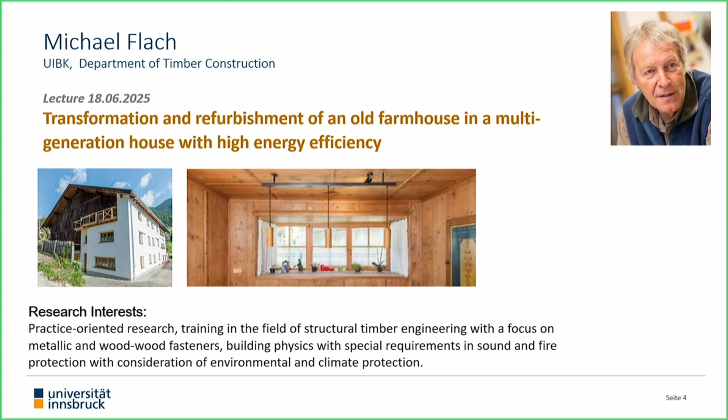Welcome, Michael Flach. Thank you. Thank you, Rainer. You switch on, I'll just go ahead.

It's the first time in this nice room here. It's huge. Not many people, but I guess all the people are outside, watching from outside.

I'm retired now since 5 years, but as you can see, I'm still teaching. I'm looking for nice places to teach. I'm teaching every year in Corsica because I speak fluently French, and also in Italy, in Rome every year. And since last year, I'm quite often in Bhutan, the Kingdom of Bhutan, a Himalaya state. I just came back after 4 months of English teaching, so my English might be a little bit Bhutanese, but it has improved because I don't speak English very much otherwise.

Rainer told us it's about refurbishment, but it's about climate protection. We know the last numbers of warming up, we have now here about more than 3 degrees of warming, so we really can feel it. We can feel the consequences, especially here in the Alps. We have seen in Switzerland what happens when the mountains defrost and rocks come down.

I just give a summary first. You have everything in German in black, and in English in green, except the last part which is only in English. I speak a little bit about my background, it's a little bit philosophical, I have a special approach about engineering. I'm speaking about my doctor thesis about ecological timber facade, which was quite new because most facades are made with artificial materials. Here we had a system which is prefabricated with ecological insulation material. Then I speak about my farmhouse.

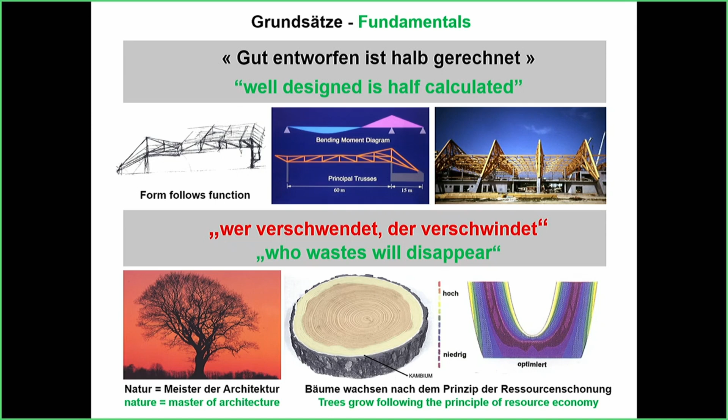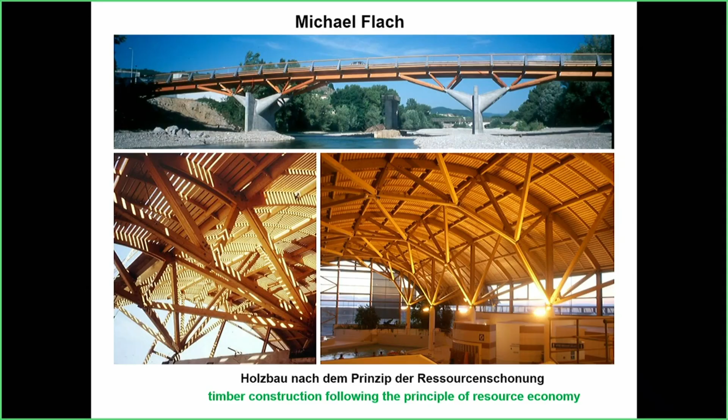And this is my kind of structures. They look complicated, but you see there's a kind of passion and an approach seen from nature. And nature never has simple linear beams as we see in 90%. You just look here upwards, you always have linear beams, very easy to calculate, very poor design work. But in nature, if you see the branching, they are always spatial structures, interconnected, redundant, and much more effective than the simple structure here. I will come back to it in the last part to explain.

When I applied for Innsbruck, we were 20 candidates. I was coming as an outsider from France.

Nobody knew me here, and I was the only one who had no doctoral thesis. So in the end, I was chosen ahead of the 19 doctoral theses because I had practical experience, and because I announced that when I'm teaching, I teach how to design, and not only to make formulas or mathematics and no construction design, as I suffered when I studied. I suffered from the poorness of design, of the principle of design. And if you want to design, you also have to work, you have to apply.

I lived in a period when we were pioneers with digital technology in designing. So I had the very first CAD license in France with CAD work. You have seen the office was very small. I didn't have a place for a design table. So we decided to do everything on CAD, on computer, to save space. And so we became pioneers of digital designing.

And then after designing came the fabrication. You have the CNC machine that gets the information from your CAD plans directly, without paper. And then you have a very precise full production. And modern timber structure has made a big step. We call it Quantensprung, a big step, because of digital technology.

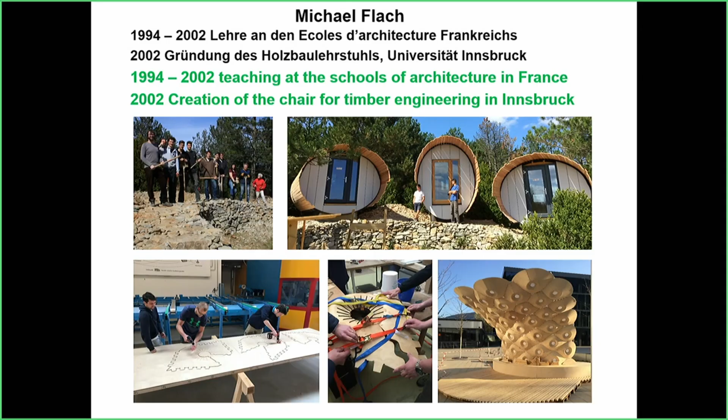It's the entry of our building. It's made of 42 elements, which are all different. And everything is so precise. You stick them together and you make an amazing thing. This is just a pedagogical experience, but they learned. And then we built other buildings here also with CAD. We collected pieces from Tyrol, and then I loaded a big truck to bring it to southern France, and in 1 week we built a passive house barrel, which is a tiny house for students.

So I came in 2002, so it's 20-some years ago. I always live in periods of 23 years. I came at 23 years old to France, and at 46 I came to Austria. And after 23 years now, I'm going to Bhutan, and we will see if I still have 23 years left for Bhutan. We will see that.

And so I was a new generation of professors. Timber was a new material. So I raised up a timber chair at the University of Innsbruck, which is astonishing because Innsbruck is a kind of capital of the European wood industry. Inside a circle of 200 kilometers, you have all the big players of the timber industry, especially the glulam industry. You have Binder, you have Pfeifer, you have Egger, you have Rubner, and some others which produce more than half of the production in Europe here around, with the wood we get from here. But they had no design training and no timber engineering, so it was time to build it up.

And then I felt that timber alone is not enough, and I was happy when Wolfgang Feist came. I phoned him in Darmstadt and asked him if he preferred to live here in the nice mountains rather than in the cloudy Darmstadt area.

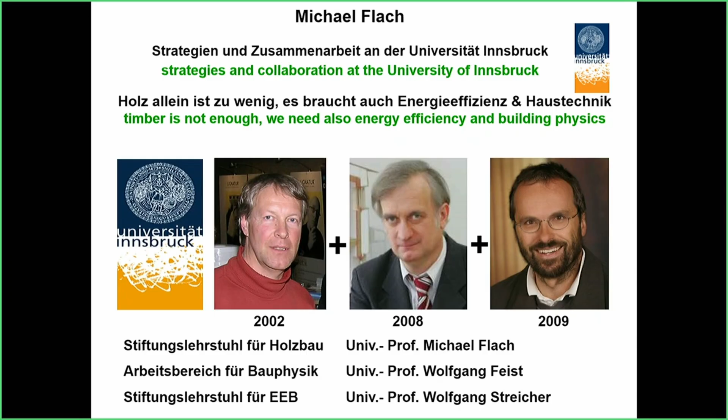And fortunately, he accepted. So we shared, I guess, 15 years together, and we worked on projects together. And then there was Wolfgang Streicher. I don't know if you know him. He's more in the energy field, but he was a very good complement for our research work.

So one of our projects was a smart city project. You worked on it too, I guess. Everybody worked on it. It was, I don't remember the date, 2012 or 13. It lasted 7 years. The idea was to make a demonstration project on how to reduce the energy consumption for heating in cities or in districts, to reduce it by about 50%, by refurbishing, by renovation.

So we are now in the topic, and then there were measurements. So we worked on it, and it finished with monitoring. Everything went well, but I was not very happy because I was hoping that there would be some work for timber engineering or timber refurbishing. Everything was done as business as usual. That means 99% of our external insulation is polystyrol, artificial insulation materials.

And the first thing we did was a life cycle analysis between the artificial classical insulation complex and an ecological one, made of natural fibers, of wood fibers, of hay, of cellulose. And the reason to do that is, I completely agree that passive house is the best practice, the best solution we have today, and I agree with everything of the concept of Wolfgang Feist.

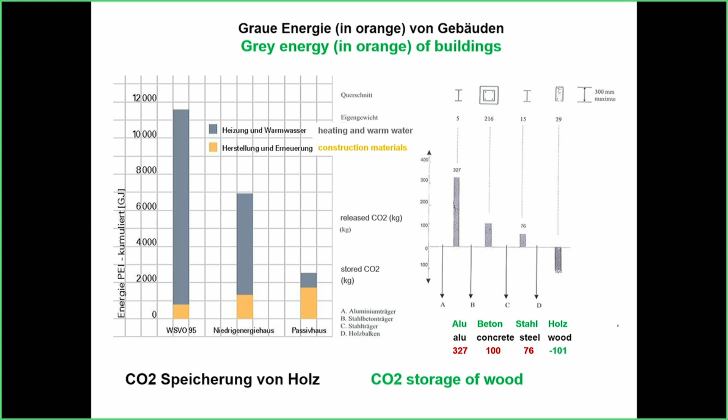But today it's clear that if we substitute concrete by timber, we save approximately 2 tons of CO2 per cubic meter. So with today's climate change, we have to care about everything which can reduce it. The same thing is true for insulation materials. So I started a doctoral thesis with Clemens Le Levé. He did his work on a topic called the ecological timber facade. So we had some basic principles for his work.

We wanted to have standardized elements, timber frame, which is the cheapest mode of timber construction. We only use ecological insulation materials. We didn't have ventilation because it's a cost question. And then we need a system to hook it, to fix it on the facade. This was one part of his work. We call it a system connector to make it easy. And it must conform to the passive house standard, open to vapor diffusion. These are some physical basics we respected.

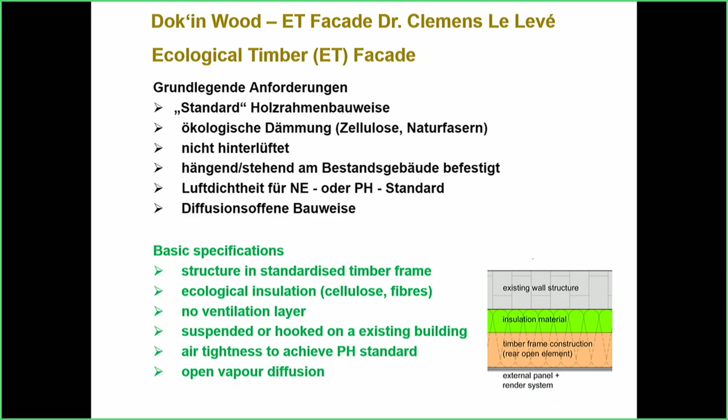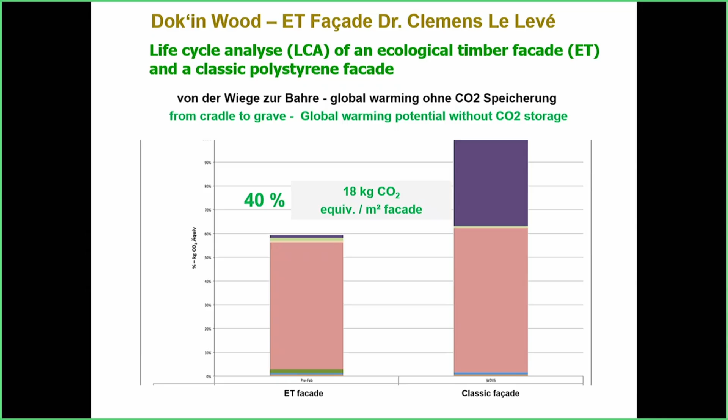And then here we did this LCA analysis. You see, for the fabrication, the difference is not very big, but if you take into account the recycling, some of these materials were quite toxic, and recycling was quite expensive, and even with the energy balance, we had a difference of 40%. So insulation is maybe only a small part of the building, but it's a part of it, and if we can reduce it, it's normal to substitute.

And then we have the process of how to use this panel. The first thing is, in timber construction, we were used to digital techniques. So we made the inventory of the building with, what's the name? A tachymeter.

A tachymeter is a kind of laser machine. It sends a cloud of points onto your subject, and then it gives a digital print of your facades. You can have very complicated historical facades. It gives you really like a plaster, a digital print of it.

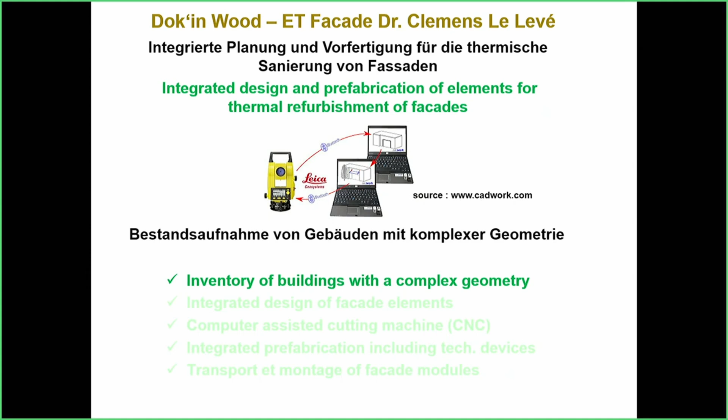And then the next step is to bring it to your CAD system. We were used to working in CAD. The cloud of geometrical data goes into a CAD program, and then you can build by prefabrication in a factory or workshop. You build an element which fits the digital imprint you made of the facades.

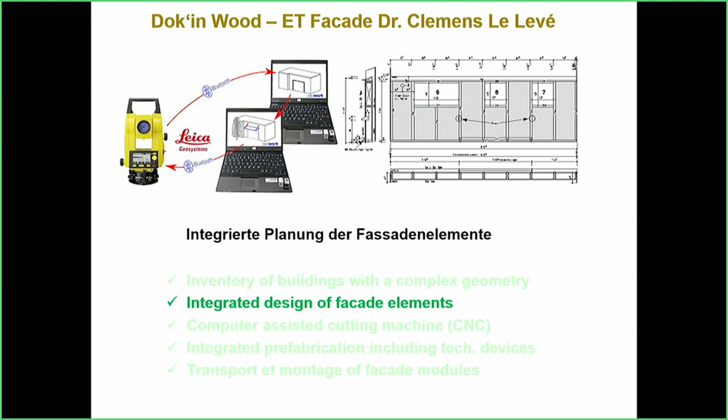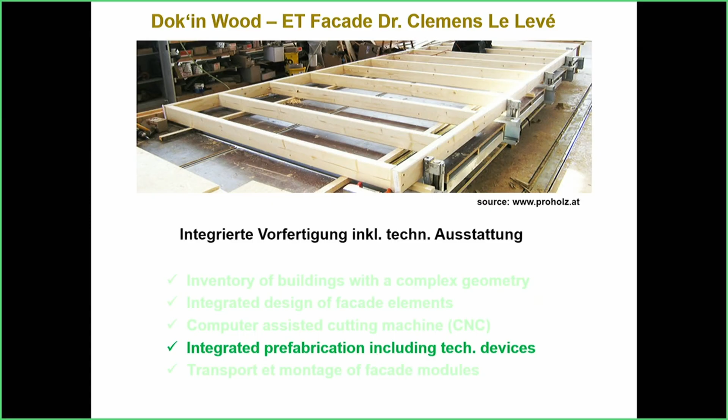So you have the counterpart, and then after CAD, you bring it to a CNC machine, and everything is very precise. You don't lose data, you don't lose precision, and everything goes very fast. And then you have computer-assisted cutting machine. Here you see these are easy elements. In America, all the buildings with 2x4 frameworks are done this way.

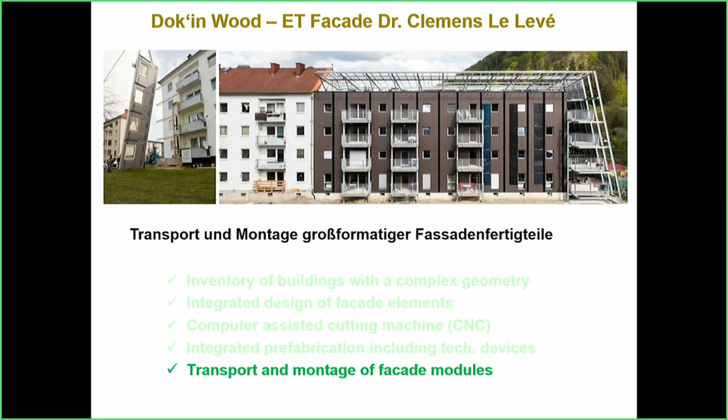And then we had the transport and montage of it, but we also needed a connector. So I'll show you the work we did on a connector. The connector is made of two parts. One steel part is fixed on your wall. You can have different types of wall, different qualities, with two bolts, as I will show you later. And then another part is fixed on the prefabricated element.

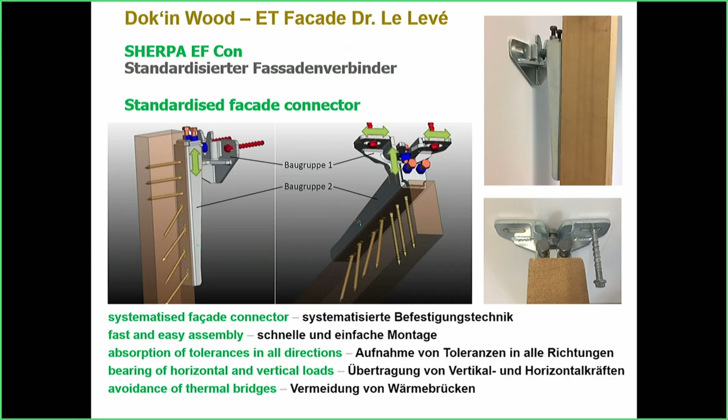And then you connect them together, and you have a kind of millimeter regulation to put your prefabricated element in vertical or horizontal equilibrium to make it fit very precisely. So we developed a steel connector. We tested it for all the loadings, and this is a systematic concept to avoid complicated design and to make it ready for the market, to produce it in big numbers.

And then if you produce this kind of prefabricated element, you face all the fire tests you need to have a certified element. You cannot just build as you want. You have to prove it, and you have to do more than calculation. You have to do some fire tests.

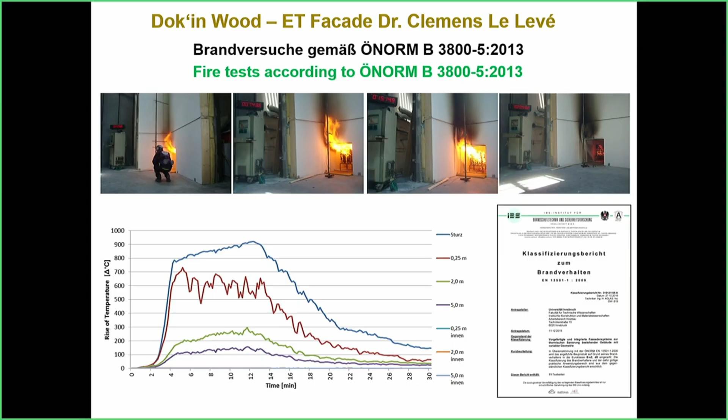So the company Neue Heimat, you know them here, invested and gave some money to do the fire test, and now we have the certificate to use these prefabricated elements for buildings of maximum 4 stories. If you go higher, it's more severe, so we just go step by step. And then you need somebody to test it. So I was the one who tested it.

I bought a farmhouse, not only for the test, but I was always dreaming of it as a young engineer. My first business concept was to buy an old farmhouse, refurbish it, then sell it for a good price, buy 2 other farmhouses, and have a kind of snowball system to become a rich man. But things happened differently.

But coming to retirement, my dream was still open, and I had the time to look for an old farmhouse, which is not very easy here in Tyrol because everything is expensive. So I traveled 2 years with my bicycle in every valley looking for farmhouses. You cannot easily buy a farmhouse if you're not a farmer. It's reserved for farmers. So I had to buy a farmhouse where the former farmer built a new one and took the right of use in this new farmhouse.

So I found one here, really by chance, which was affordable. It was not so expensive, and I liked it because it has a nice south facade with the bracing system. You see it, but it was a huge building, about 600 square meters. This building already has a history. It's precisely 400 years old. Many of the old farmhouses have this age.

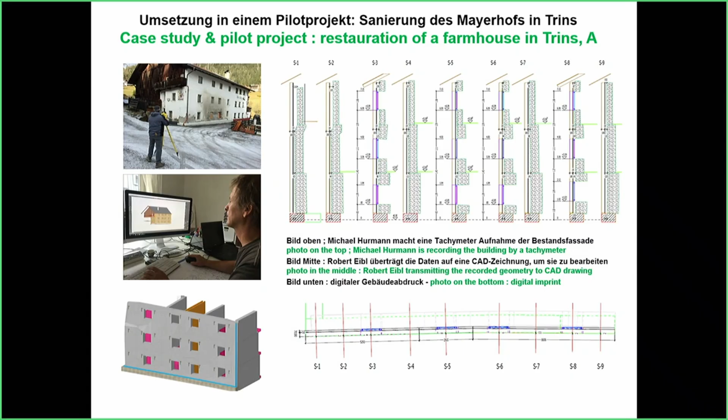You must do this inventory to prefabricate something that fits with a precision of 1 millimeter or 2 millimeters. If not, you have no airtightness, you have empty spaces, etc., and a lot of work. But if a machine is doing it, everything is prefabricated, and things go very easily and very fast. So we started prefabrication. It was about 10 kilometers from the Gschnitztal in a carpentry.

So we had the structure. We put in the windows too. We had to change the windows because the windows were old with simple glass, so we had triple glass windows. And even the opening around the windows had a special geometry, and you can already see here the different metal system connectors, but you also see the different pieces of wood with different thicknesses, adapted to the geometry of the wall.

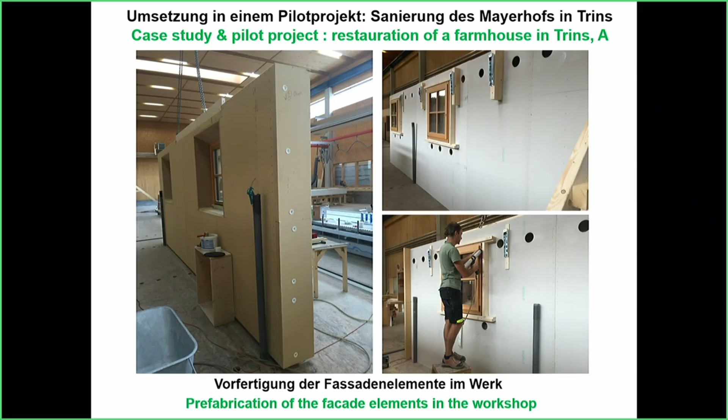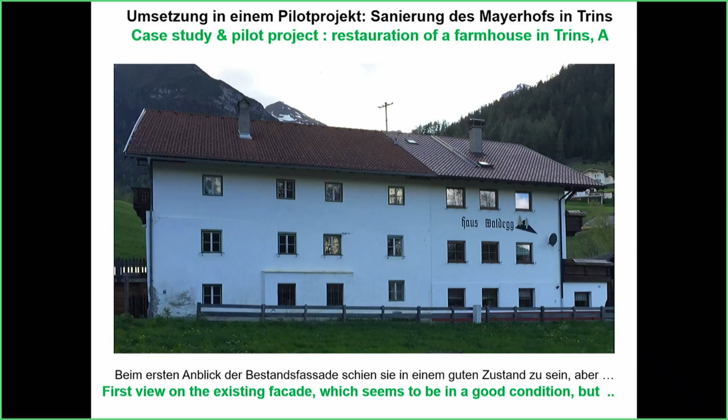So there was nothing constant, nothing similar. But if you do it with a digital tool, it's easy to do. You just follow the different steps, and then you have a well-fitting prefabricated element. So first the wall looked quite easy. It looks straight and everything. I want to keep the same opening of the windows, because it should have the same exterior after. I don't want to make a modern architecture house. I respected the pattern of the windows.

And then looking a little more precisely, you see all the damage in this wall. It was a cheap wall after it has crossed different world wars and poor living conditions, and there was moisture everywhere. They had no water management. And then you see on the top here on the right, a big diamond saw.

We had a part that was sticking out of the wall, and we were so close to the border, to the neighbor, we couldn't even insulate if we didn't cut a part of the wall. So we have to cut it. You see the saw here. But with modern tools, you can do everything. There's always a solution. So we cut the wall, and then we did some openings. 2 or 3 windows, we made them bigger, and we had to go inside the building too with a big bagger to dig inside the house.

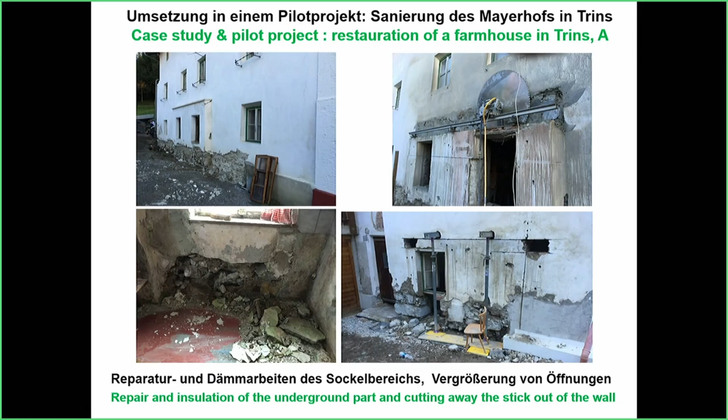So we really had dirty work first to do to renovate, and this was the condition of the facade after refurbishing and repairing it. We have a socle, the basic area. We had a sealer. We had some additional insulation, which is waterproof. And you see here the connectors.

The connectors, we did some testing, and we found out that the wall was in such bad condition we needed steel rods going through the wall and anchored on the backside. On the backside, on the level of our floors, we put out all the floors, and we kept the floor on the inside in balance with the prefabricated element. But then you have to drill in a big wall, and if you try to drill a straight hole and you hit a stone, your driller goes 2-3 centimeters elsewhere.

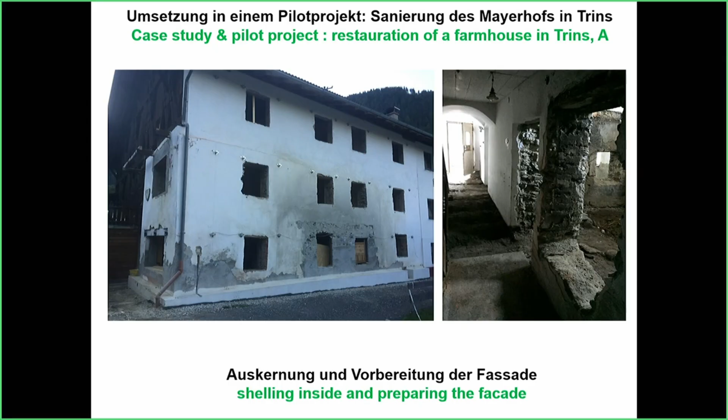So we drilled very precisely from the inside, and from the outside we just left it as it was, and our tachymeter inventory took account of the real position. So we don't have problems with drilling not straight. With this digital imprint, we can take account of it. So it was not difficult to do that.

And then the elements were coming. So first, for 3-4 months, nothing happens. You are just digging in your house, putting all the gravel out, and then the elements come on trucks, and then a machine took every element, and this is the first day of montage.

We started on the ground floor, so we had elements about 3 meters high. It was the height of each floor. We determined the height of the different floors. We made them equal with new levels, and the length was about 6 meters for transportation.

You have a prefabricated element, and every element you put in half an hour to an hour. There are just 2 people to handle it. This is a nice building phase in timber engineering, in timber construction. You have engines, 2 or 3 qualified people who know how to handle it, and then it goes very properly, very quickly.

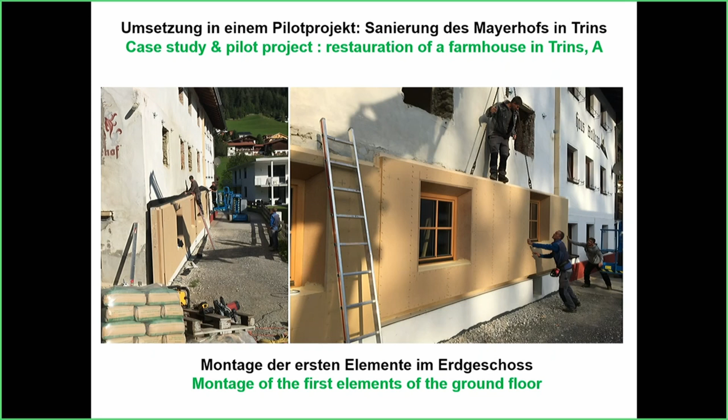In 2 days, this was the second day, our house was insulated. It was not finished insulated because we have the interspace, of 10 to maybe 20 centimeters. It was not constant. The element was constant, it had constant thickness, but the interspace was compensating the geometry of our wall.

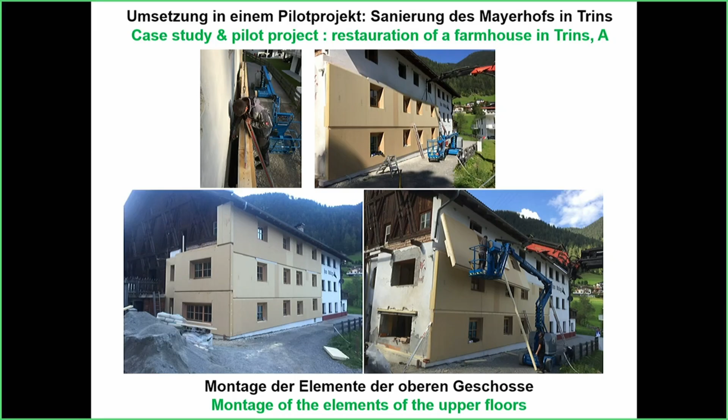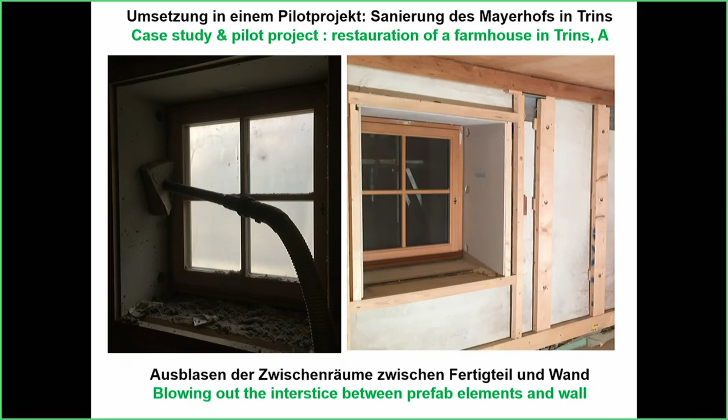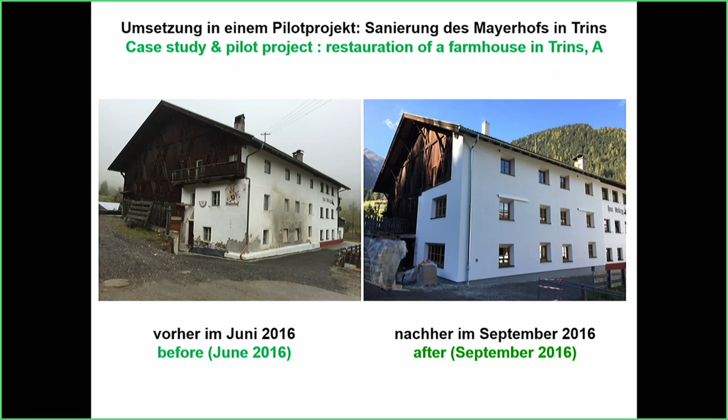This was just before, in June, and 3 months later winter was coming. I was living in the house some weeks later, so we had to work on the inside now. It was not so cold anymore.

The floors were in very bad condition. It was timber floor. The house was not inhabited for 10 years, it was not heated, so you can imagine the moisture conditions in the house. Everything was so uncertain and even dangerous.

So we broke out all the old beams. Sometimes we had 3 stories of empty space here. We did most of the work ourselves. We had some alpinists with ropes to ensure the operations.

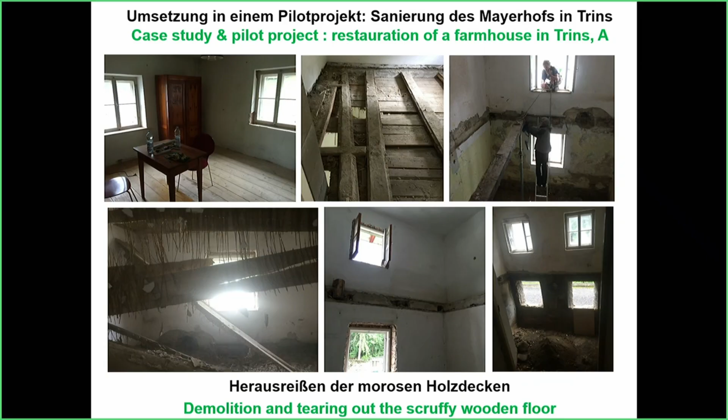And then we built up, and we dug here inside. If you see that, you might not be motivated to do such work, but for me now it's done. I'm happy about it, but it was really hard work here.

So I put out one wall here, and we organized the space a little differently to have more light inside and a bigger stube. It's a kitchen place. We put out one wall, and we underpinned it with a steel beam. It's not here in place, but we will see it - the steel beam carries the wall of the upper floors. You have 3 stories of big walls to be carried if you take out a wall here.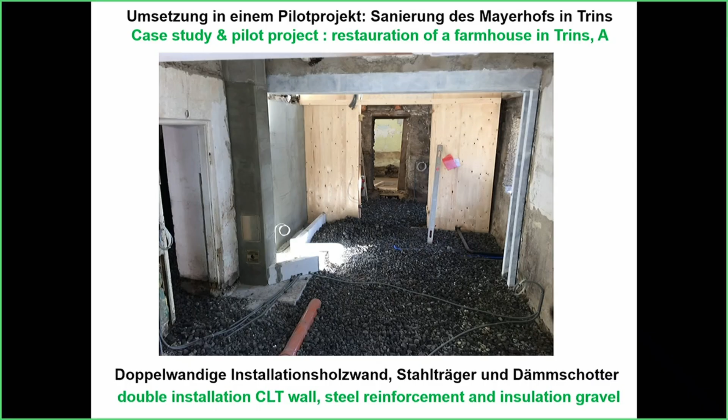And then we dug out the ground, and we put in insulation gravel, 60 centimeters, a big layer of insulation. Then we started building up our building from the inside.

We put another wall, a new wall. This wall is interesting, it's a timber wall. We call it cross-laminated timber, CLT. It's a massive timber, but it's a double wall, with an interspace of 20 centimeters in between. Here we have all our pipelines, all water, ventilation, electricity, and you can have a look inside later for inspection or if you have a leakage. Everything is here, and you don't have to drill in stone walls to put all your electricity cables or pipes inside.

So this wall was collecting all the water system from the kitchens and bathrooms, they were all connected to this double wall. It went through the building, and this might be good advice for you if you restore an old building: foresee a place where all your cables are grouped and you can have access later, because technology is changing. Especially for computers, you have to change all cables after 20 years or so.

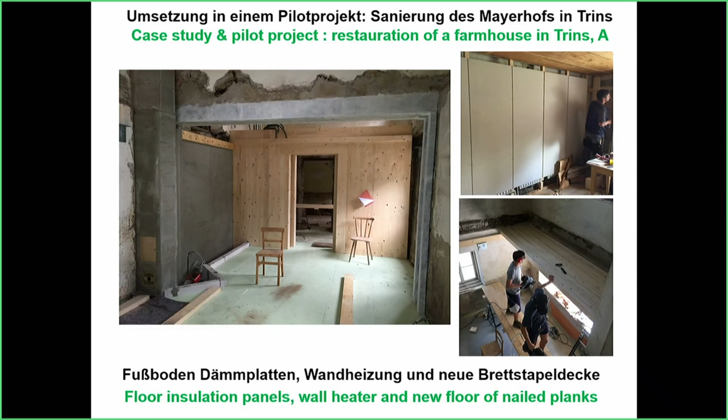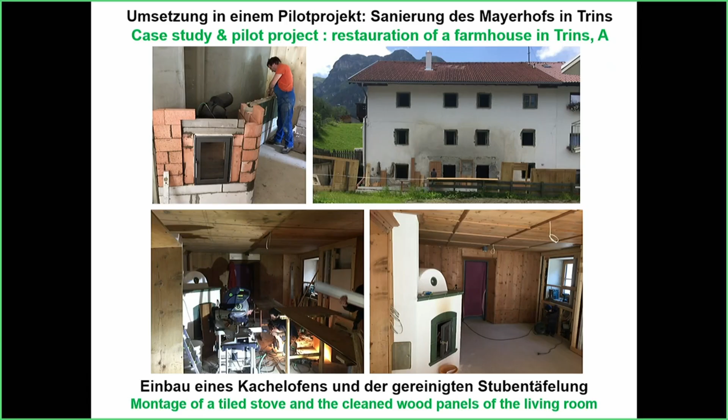And then we built up a tiled stove. The old one was really not nice, so we built a new one, but always with historical elements we recovered somewhere. Here we heated for the first time just before winter came, and you see we have a timber ceiling.

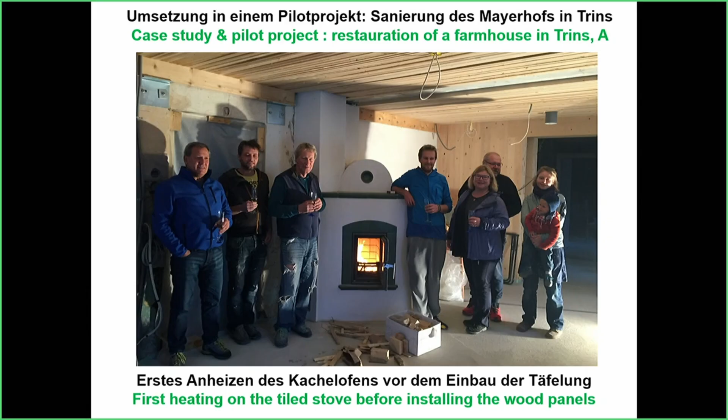There are stacked planks, just planks. I will show you - you can just take planks and nail them together. If it's a building where you have no crane and you have to carry your materials on your shoulders, it's easy to carry a plank, and then with planks you can easily make a timber floor. This on the right, on the top, was the old building here.

It's quite dark, but we recovered everything. We recovered the old painting, we recovered all the wood, we completed it, we completed the nail.

It was handmade iron nails from a valley, somewhere in Italy. And at the end, you see the inside is a modern stube with all this old wood. And this is for me the heart and the memory of the house. So I think this is nicer than a new house where you have white walls everywhere.

Here you have all the memory of the house inside and the old living culture. Inside the walls, we doubled the wall, the stone wall, with a timber structure, and we filled it out with clay panels, earth panels. I had a carpenter who is passionate by the combination of clay and timber, which is a very good combination

for nice indoor climate, for moisture. So the elements are prefabricated. They are 4 centimeters thick. You nail them on the 2x4 structure, and then you have a final layer to finish it up. You see the bathroom here with a clay wall, and we never have condensation in this bathroom because the clay is absorbing the moisture difference.

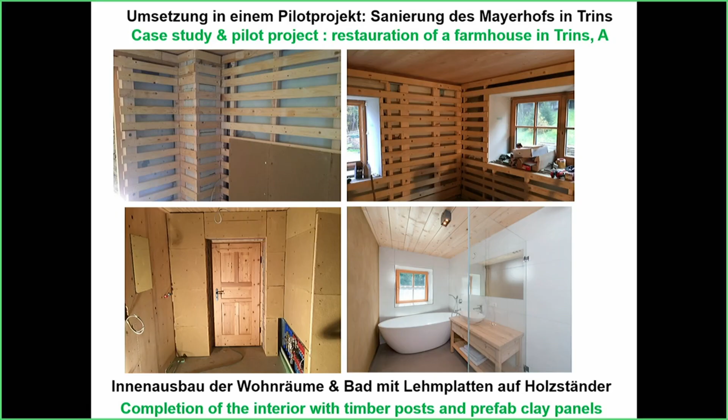And then we have finished the first part. It was the hardest part, and the last part was a big work too, but it was not so dirty.

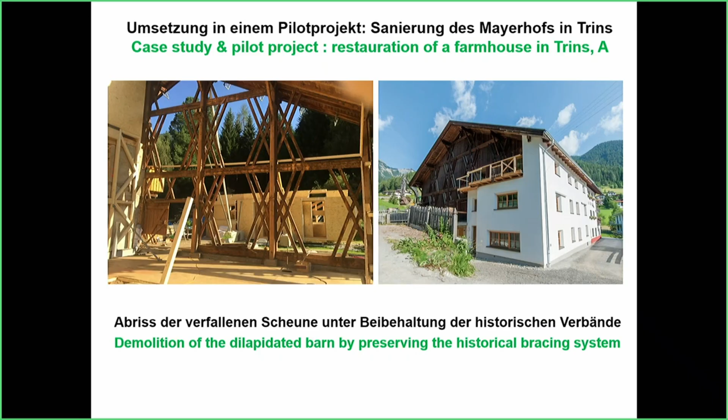So the barn house here was in such bad condition, so we broke down everything. It was dangerous. It was a barn house, not done for living there, and it was bad structure and bad design. We just kept the bracing system, just 1 meter of the roof with the bracing system, and inside we broke out everything.

We only had 4 days to do everything because rain was coming, winter was coming, and in 4 days you have the time to break out everything and bring the new house inside. And this you can do with timber because everything is prefabricated, prepared. We have numbers, you have a logistic where everything is organized, element arrives just in time with a truck.

And here you see there's just a difference of 3 days maybe here. Here you see the new house in house growing up. It's a 2x4 house with passive house elements, so highly insulated, airtight, everything we need, but with big openings.

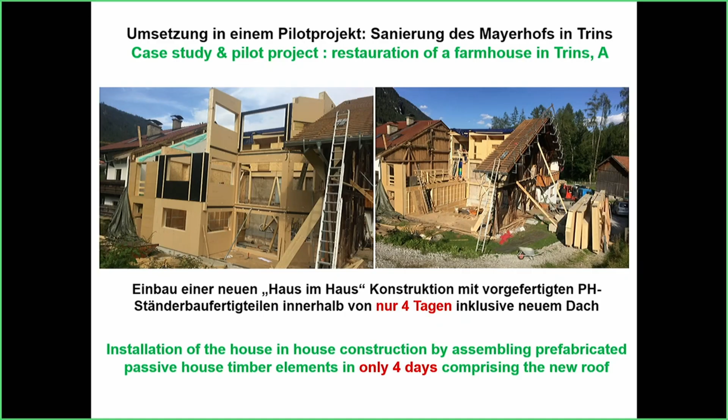Today in our modern culture, we would like to have a lot of light. We want to have the connection to the outside, and we are not closed in caves as the old farmhouse had lived before. So, and then we have our tree.

My tree is part of my design work, and now it's part of the design work of my son. My son Sylvain, you see him here. He was studying here already, and he did all the parametric design of the tree. So he did all the computer work, and he is now well earning money in Switzerland. He's in a very big company. He's specialized for parametric design and happy to be there.

And this was his baby here. He assisted for the fabrication. We went to metal carpentry with 2 masters. They had so much fun to build it up.

You have to weld everything together, and it's not so easy to weld because with the heat, you have deformation. Everything must be very precise. And to put some wood parts inside, it's not a problem for a metal carpenter.

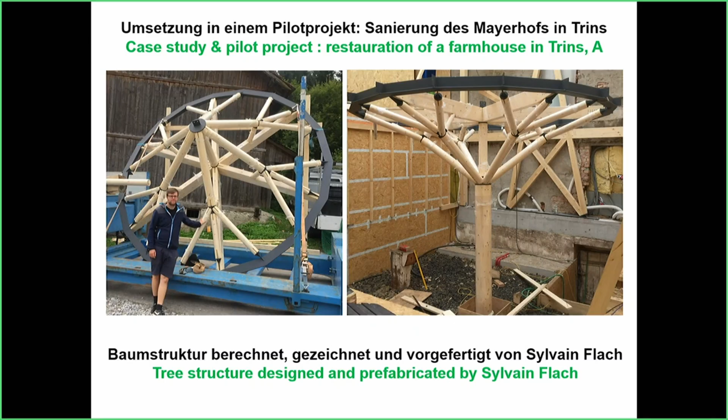So it was prefabricated. It was a big wheel of, I think, 4.5 meters. So it just went on a truck, and it was prefabricated, and we can see it. I hope we can see it now. It's coming with the crane. You see, you have to put it in time because after the roof, it's too late. You have no place to put it.

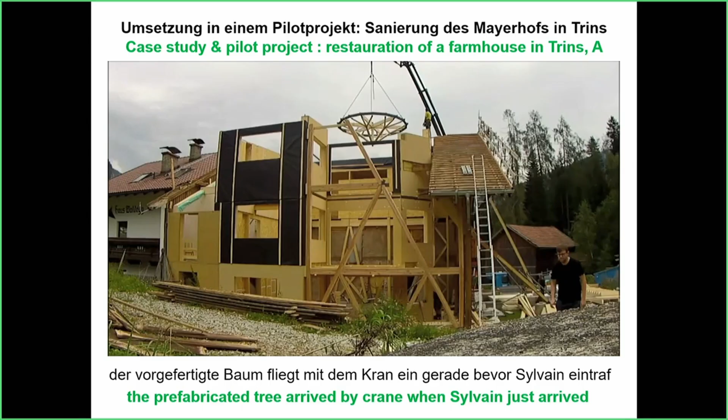My son came a little bit late. He wanted to watch, but I took the pictures. So this was the 3rd day, and then we finished up here the inside work.

So this is timber working here, and you will see we have the central support point here, the tree. If you are in the lowest part, you have the biggest load, so you need a strong structure. And if you're going up and up, you're reducing your column.

And here we use the innovation, innovation. We built the first floor with this point supported. We only have a column and no beams. We only have a plate and a column.

So we developed in Innsbruck the so-called spider connector. And the spider connector, he gets the innovation prize of Germany of all disciplines, in Great Britain of all disciplines. And he changed the typology of houses now because we can build high-rise houses only with columns and plates and not beams anymore. So we save in every story, we save 30 centimeters. So after 10 stories, you have 1 supplementary story because the height of your system is reduced because there are not beams anymore.

So it's a clever system. And the first one was here. The problem was when you design a nice structure, you reduce the material to have a filigree structure, and then you make a cost calculation by a carpenter. He will tell you that the structure is so complicated, so we had half of the quantity of the next floor, but it costed double the price. So the price per cubic meter was 4 times more than a massive structure.

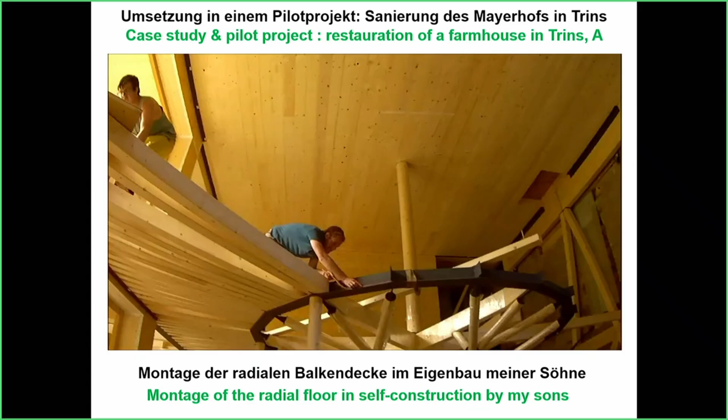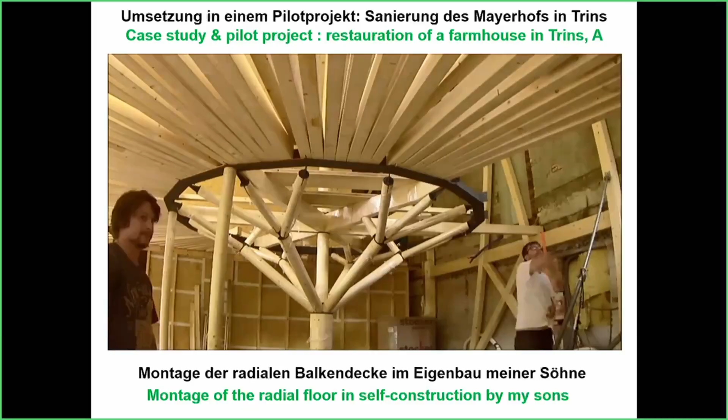A carpenter will tell you to put beams parallel, it's half of the work, and put them radial, which is not true. You have the same number of beams. They are all CNC cut, they have numbers, and you just put them together. My sons, in one day, they put all these 350 beams. They're all different, but everything is CNC cut, and it's really easy to do it. And then we had our structure for a good price.

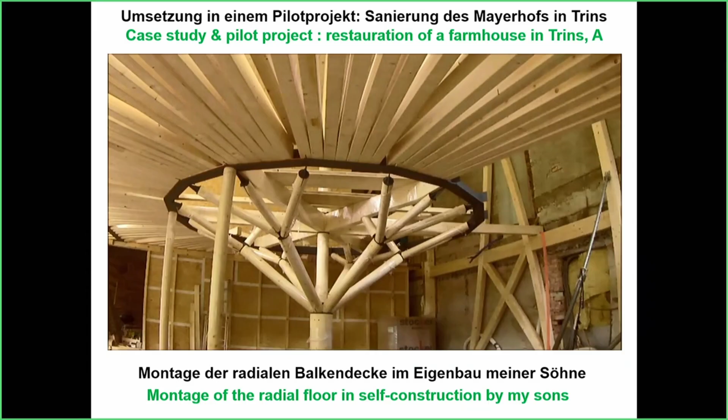So sometimes you are badly advised by the prices, and in most buildings, if it's complicated, you get a high price. Then you have massive structures with easy solutions, which cost less but have more material than needed. And this is one of our problems today in building. We use too much material because we want to make everything very simple and very heavy.

And here you see the finished structures. You have the spider here, which is a local reinforcement for punching loads. It was the first one. You see here the column and the ceiling. And you see also we have quite open space with a lot of light combined with the old structure.

The sleeping rooms were in the old structures with big walls, and in the new structure we had big openings and lots of light.

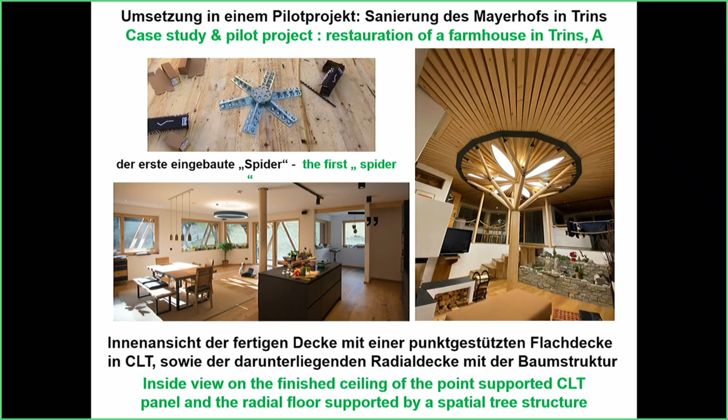The conclusion is here. We had some strategy to preserve. Especially myself, I don't have a heritage committee or some administration asking me to preserve everything. It was myself. We got help after for preservation and we got some prizes in architecture too. But the idea is, and I think it could be general: if you have an old house, you have parts that are still in good condition, that have a history, that have value. You should preserve them. And we have worse parts in bad condition - don't hesitate to put them out, to break them down, and to combine them, to open it. And you see the final concept.

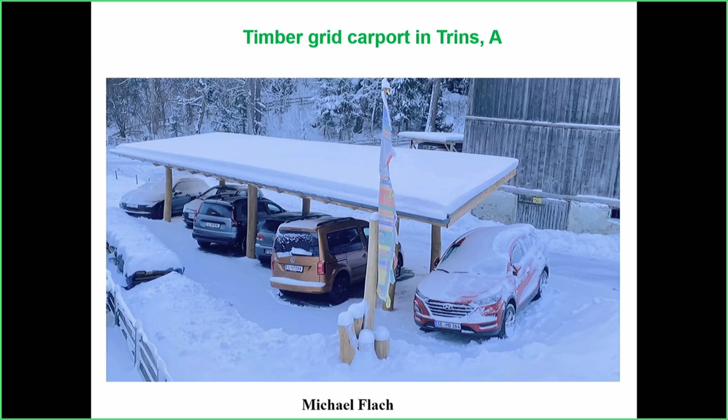And here we're coming back to nature. If you see the structure here, we don't have parallel beams. We don't have one sense for the loads. Everything is connected, interconnected. And it makes sense if you have a square ground plan to carry loads in two directions and to interconnect all the sections. If you have simple beams, the weakest beam can break, it will fall down, and the neighbor doesn't even realize it. It cannot help, it's not connected to it.

If you have an interconnected system, the strongest pieces will help the weakest one, and then the final failure will be a medium value of all the strengths. Especially in wood, you have a big variation of strengths because it's a natural material. If you have what we call a redundant system, this system can help itself. Redundant means it can mobilize additional capacity of load carrying, and the load capacity is at least 30% higher than if you have the same material and only simple beams.

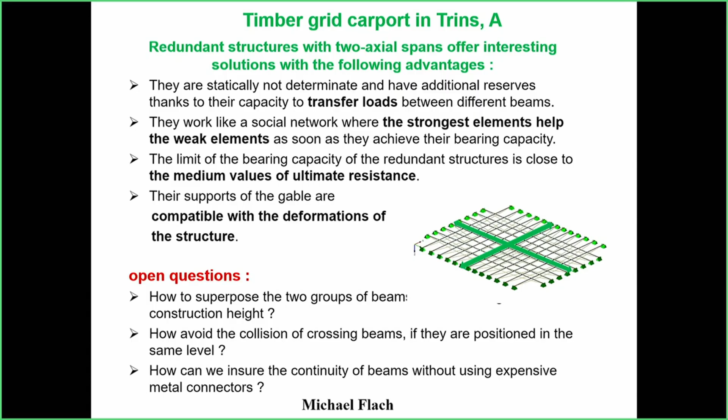So I think a good engineer should know to work on multi-directional systems, on spatial systems, rather than be happy with simple beams, which are easy. They are easy to calculate. They are easy to earn money with, but the system is not very clever. And I think this was important to do. In the code you have some possibilities to take account of it.

So you have a system factor, and at the end, I grew up with what we call mega structures. My first building was 10,000 square meters, and you have 20,000 people under the roof. And I will never build a simple beam if I have 20,000 people. If one beam is falling down, you have dead people.

If you have a redundant system, you hear cracks. You're advertised by noise, by transformation, and the people have a big chance to get out of the building before the system is collapsing. So it was one of my basics on big buildings, and I did a lot of big buildings with thousands of people under the roofs. I will never build a simple beam on this kind of building.

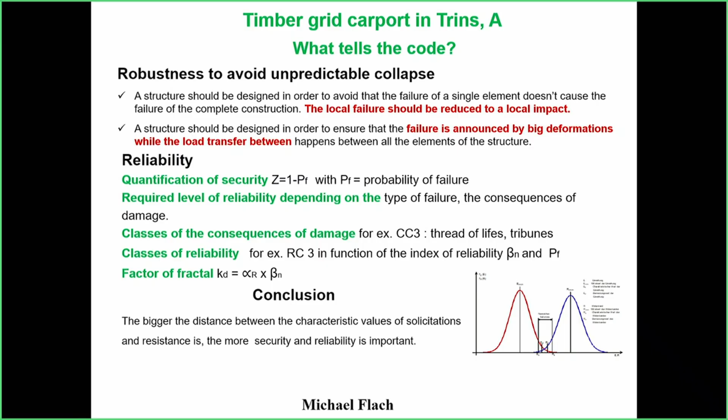And I don't have it here. I did in Paris an indoor athletic hall, which has the same size as the swimming halls they built for the Olympics, but there were just simple beams, and I don't understand this way of thinking.

So the grid. The question is how to have continuous beams in two directions. You can pile them up, but you're losing height, which is not good. So the idea is to have different layers. Here on the picture, on the top on the right, you see the red and the green pictogram. We have 4 layers, and every second layer is continuous. So you have continuity. You just have to take care to connect the first and the third layer together to work as a single section, and the second and the fourth layer.

If you connect them, you need a shear force connector. The shear force is always connecting the longitudinal stresses to the beam. It's kind of an internal lift to bring up the forces. If you have a good connection, at the end you can have 3 layers, and they have the same stiffness as the single layer with the same section. So this was a little bit the target.

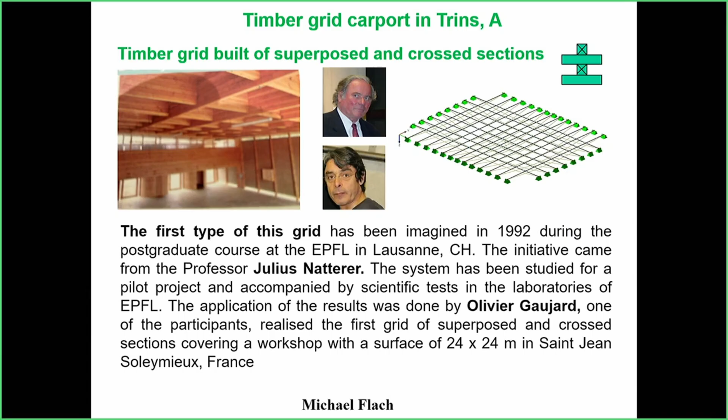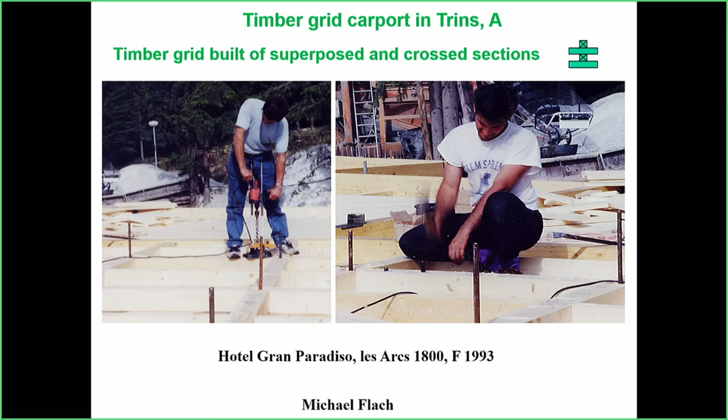The first grids we built were 30 years ago. Here, this was a hotel I did in Les Arcs in the ski station. The steel connectors were pins, metal pins. We drilled them and hammered them in to have a shear connector, but they were too elastic, so I had a loss of about 30% of the section. So the system was not as perfect as I hoped, but we did some structures here. You see, we have nice structures. 30 years ago already we knew the technique, but now we want to improve our shear connector.

And if, at the end of the life of a building, we want to dismantle it, we just take it out and we can use the pieces again. With glued timber, you cannot do that. When it's glued, it's stuck together and you cannot separate it. So this is another big advantage.

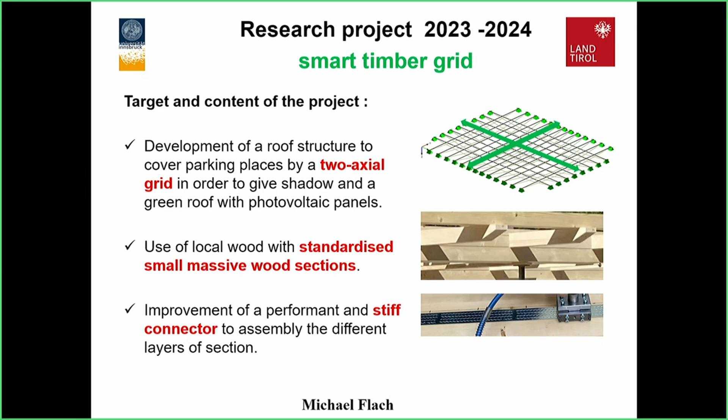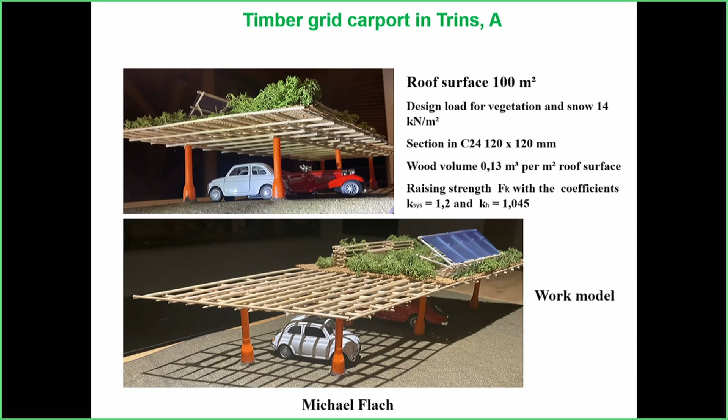And then I built a model here very quickly. The problem today, especially in the south, is that the cars are all overheating in parking places, so you have shade. Then you can have vegetation on it. You can have a grass roof for absorbing water. You can have photovoltaic panels. So there are so many uses to combine this with a shelter.

And then we built it. I built it with timber columns. The problem is they were in the ground in contact with water. But we have one local species, Robinia wood. It's a hardwood. It has the same characteristic resistance as tropical wood.

And we dig the hole here, and we put the poles inside, and then we use what we call a filter concrete, which doesn't hold the water back. So the water is drained, so the column will always be dry. And this kind of wood, you can have it for 200 years. It will not rot away.

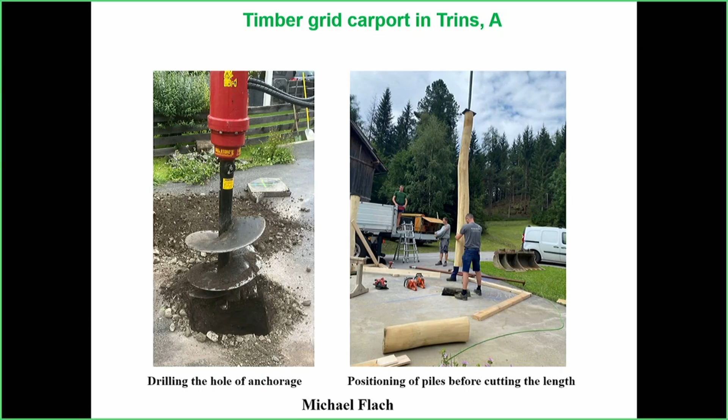And then the target of my project was not to use glulam. I don't know if you followed the wood prices during the pandemic. The wood prices were multiplied by 3. You had a cost rise of 300% because glulam products were sold in China and in the States with higher prices.

So all the carpenters here had to pay the same price, and some had difficulties surviving because of the high prices, because they already had contracts with customers. So I promised the carpenters we would find a system without glue, so you can buy it here in a local sawmill with solid wood.

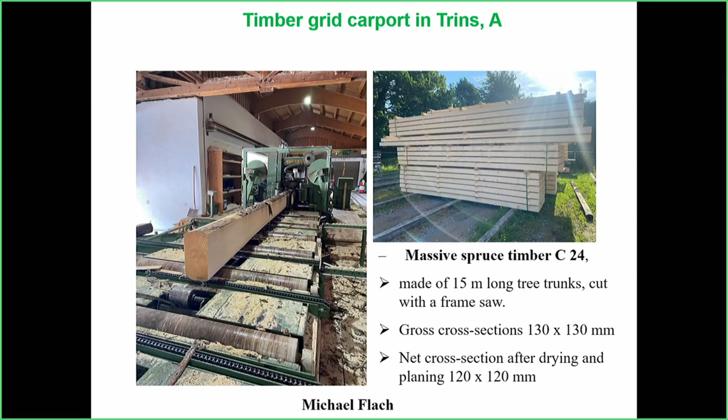He is producing 20,000 cubic meters, and he's cutting long beams, 15 meters long, no glue, and the quality is excellent. He's drying it, and here we see this is all the wood we needed for my carport. Then it goes in a drying chamber to heat it up to bring it down to the right moisture. And then we had high quality wood without glue.

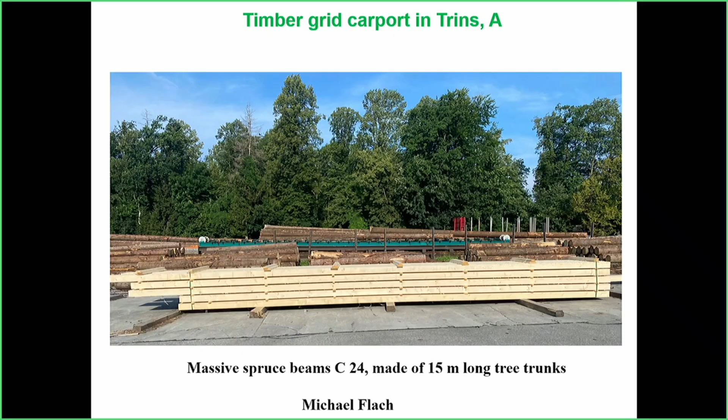It was cheaper. A glulam cost about 400, 500, and this wood cost about 300. So you get better wood. You have no glue. You have stable prices. You don't depend on global market prices. So this was the idea of our project.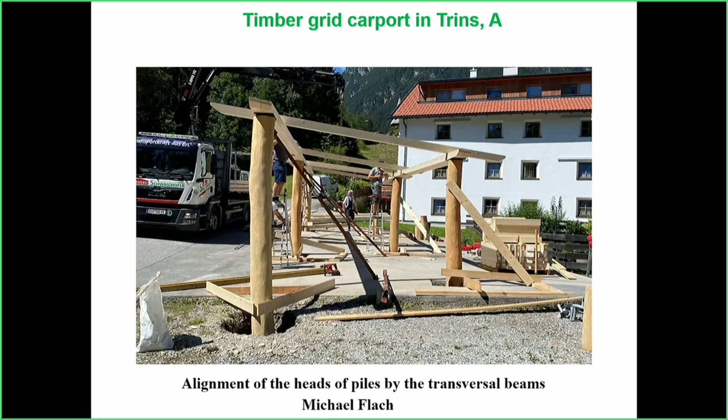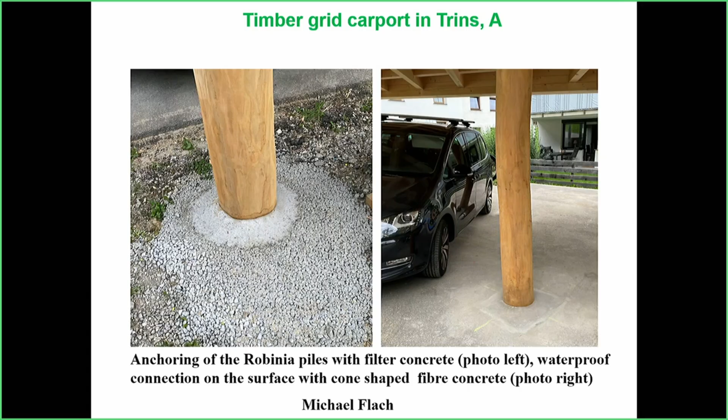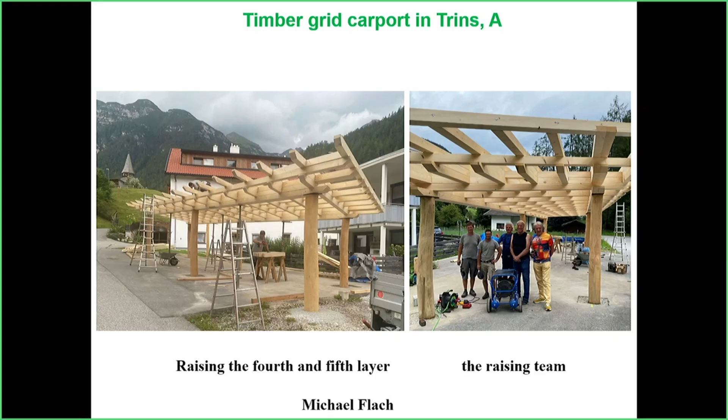Here, this is a filter concrete. And then I put a seal concrete on the top so that the water from the road surface could not penetrate here. Yeah, and then we did layer for layer. So they had really a lot of fun. In 3 days, they put the layers with the new connectors, and after 3 days, it was done.

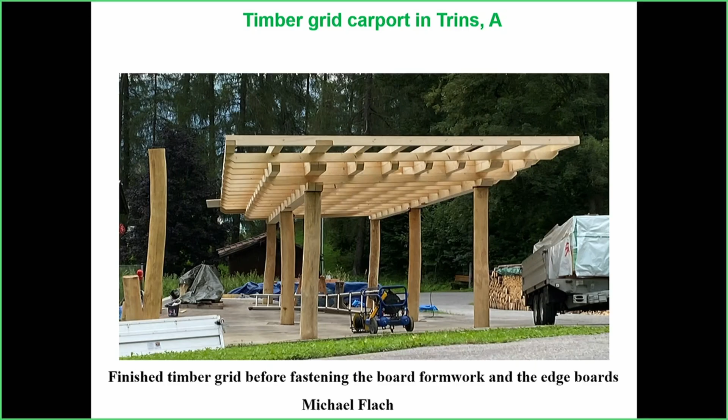It looks a little bit Japanese. It's an old technique. We know it from the pagodas, but now we have more knowledge about redundancy and higher security and connectors. And this was just 1 month before I left for Bhutan. And here you see the roof, the seal roof on it.

And then I went to Bhutan, and I had a 3-month course where they learned designing, calculation, making a project, drawing the project, making a model. Here the model. I met the vice chancellor of Bhutan, who agreed. I asked him, it would be nice to make a prototype structure with my students. He said, go ahead, I finance all the wood, everything you want. So we built here a model. This was an AutoCAD model. This was our handmade model.

And then my students had to work in the workshop. They had never seen wood before. They know how to cast concrete or how to cut a piece of metal, but no wood. The only thing I insisted to invest in, you see, is a chop saw, a Kappsäge, to have proper cuts, because they only had old rusty tools and you cannot work with it. They have no culture of maintenance of tools, and no drills, no nothing, no screws. And so we did our best.

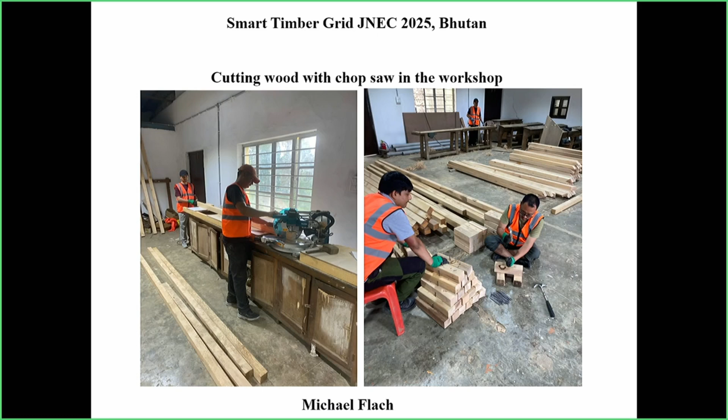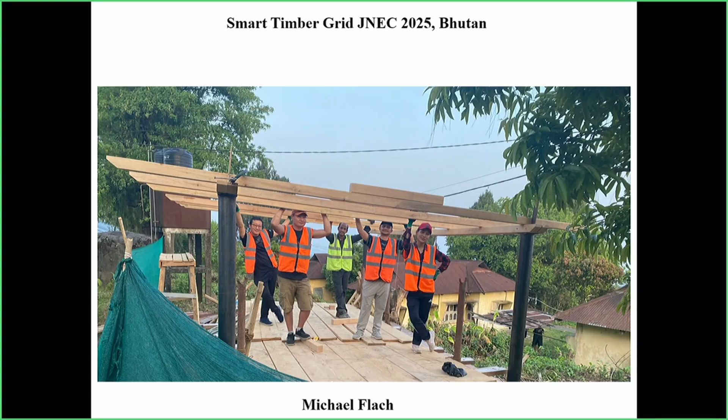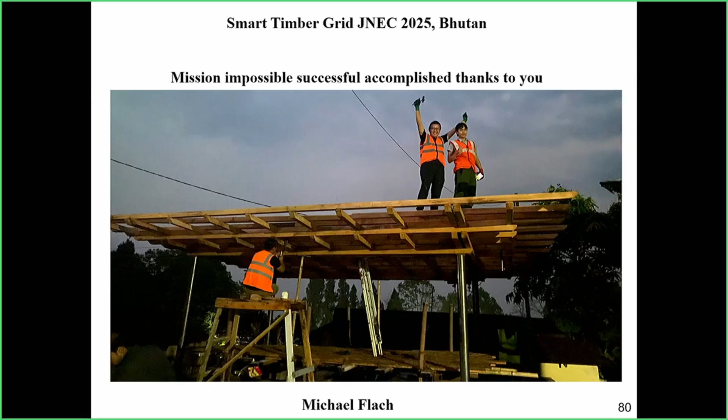And here we have steel columns, and then we were going ahead. So we were 15 people. We had 2 teams, one in the morning, one in the evening. You see, they are happy. Yeah, and then the last days we worked early till the night because we had only 1 day left to finish up the last layers, and then the last day they got their certificate.

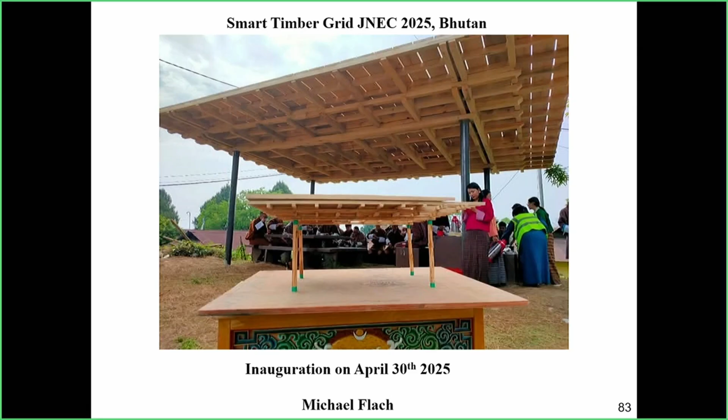And 1 hour after, we did our inauguration. Here's a model, here the finished carport. So it's to drink tea, and then we had a cake. And yeah, that was it. This is my working dress in Bhutan. It's a gho. But I was happy to finish up in time. It was a real challenge for everybody, but it was a nice experience.

So we are coming to the end. I hope you get some nice ideas for your next house. And I hope, Rainer, there were some interesting aspects about energy efficiency, saving energy, also on gray energy. I think it's important. You know, Bhutan will build the biggest city in timber now. It's a city over 1,000 square kilometers. It's the same size as Vienna, built all in wood.

But in the concept, there are over-designed, huge, heavy elements. Nobody knows how to fabricate them in Bhutan. So they're already thinking to build it in steel and to hide it behind some wood cladding. But I will continue to work to convince them to come to systems that are compatible with the technology and the materials they have in Bhutan.

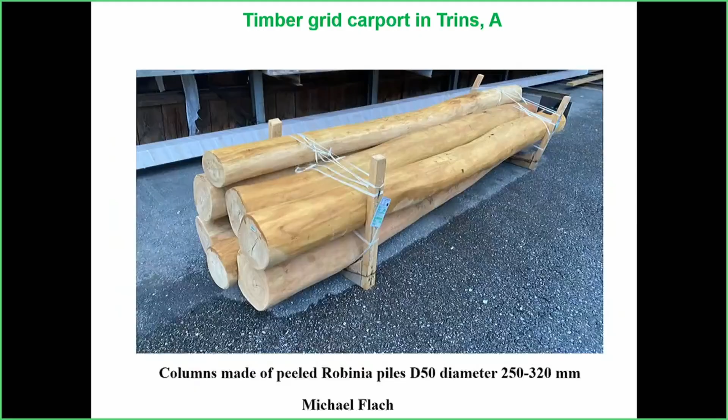You're too impressed, eh? So you can come see me, yeah? It's only one hour by bike, in Gschnitztal. Go to the Gschnitztal. I have many visitors already. It's nice in summer and wintertime. In wintertime you can go skiing. Sure, and it's nice for hiking. Yeah, some icebreaker question maybe. Have you some questions from outside? Yeah, we can have a look.

Amazing lecture. I wish to live in a house like this. Do you know about any other farmhouses that are going through such a transformation in Tyrol? I think this one is quite unique, but I know there are many young people doing some restoration work. Sometimes on Tyrol television you see some examples, but every project is its own challenge. You can never use the same solutions on every project, which makes it sometimes difficult, but it also makes it exciting because you have to respond to the parameters of your project.

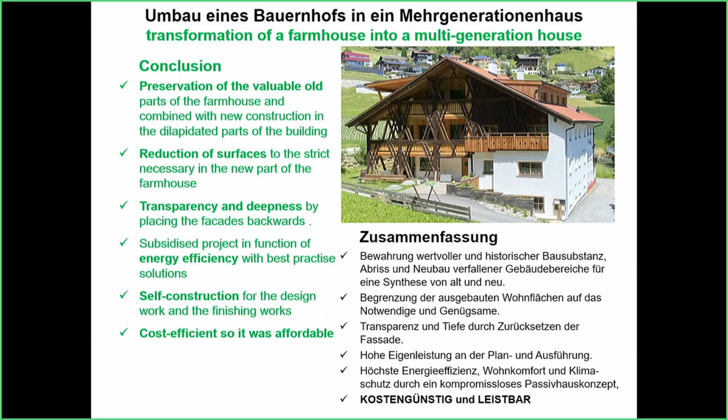And also not only for buildings, housing, and refurbishing, but also what you showed us in the last slides with the carport. This could also be used as a structure for PV elements. Nowadays, all the PV substructures are made of galvanized steel, and this is a chance to do it in wood, long-lasting and in an ecological way, with a positive CO2 balance. But are there no examples for that already for some PV structure? My carport will get a PV structure, so it's the first one.

The market is growing, and I think now the supermarkets are thinking about covering the parking places. Because the first problem is overheating in cars. You cannot leave a dog inside a car now, or your handy and electronic devices in a car are overheating. So we have the overheating problem, and then we have problems to protect our cars from heavy snow, from gravel, from natural climate problems, and we need to face this for the PV.

It's a nice place, and we have to substitute also the asphalt, the water draining system. So we need some additional devices now to compensate our road covering. Yeah, the PV could be for parking places, but also for agro PV. Sure. That's also development.

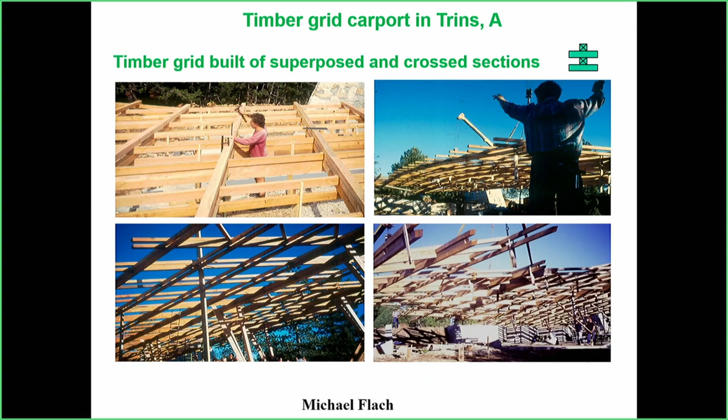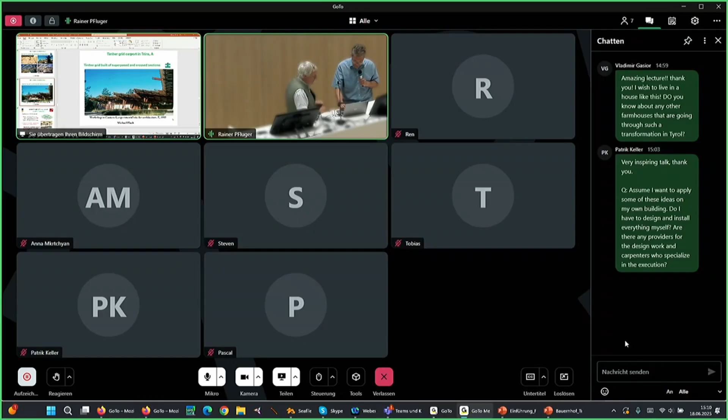Right. Any other questions? Let's have a look again online. You can also speak German if the language barrier is too high. German is no problem. There are no further questions, so then we come to an end.